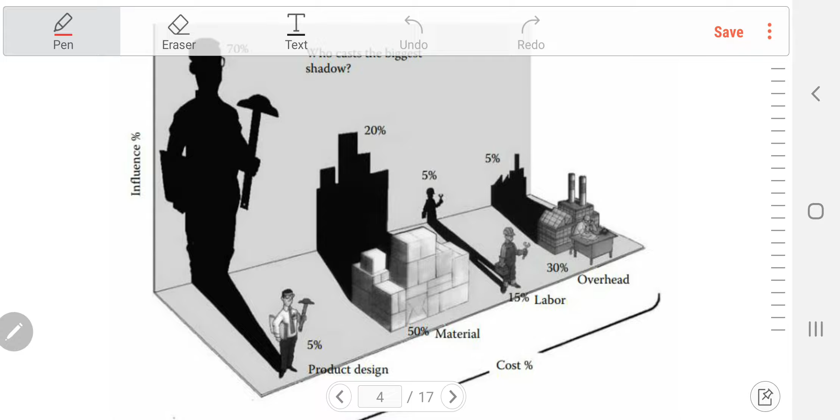But the thing is, when we look at the process of product manufacturing, we can see that product design, although the actual work is only about 5% of the production works, the influence is really huge, 70%.

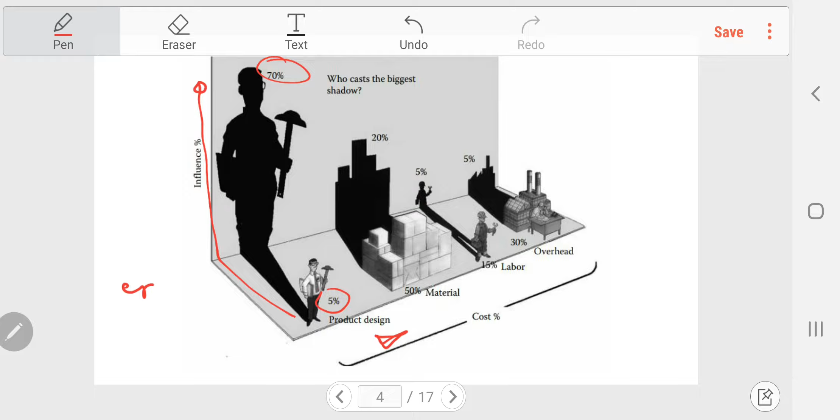And any error or correction, maybe rework, at this stage will cost you a very high amount of money when it already comes to this stage.

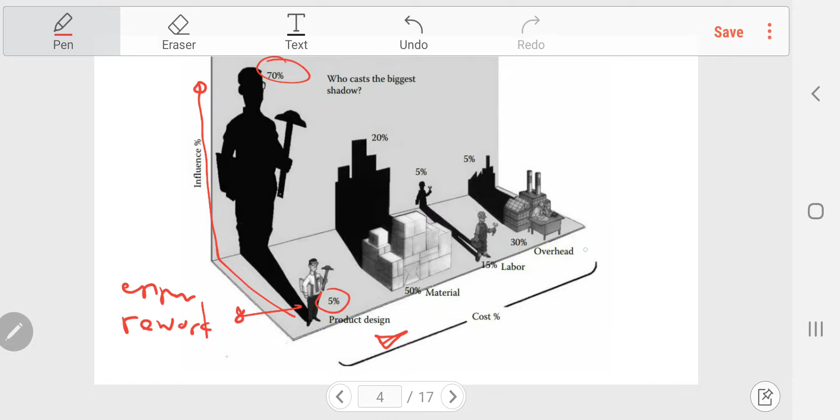So we need to keep in mind that it is good to do design in the best way that we can, or maybe try to do the first time right. Meaning before we go to the next process, we have to make sure that this design is at its best.

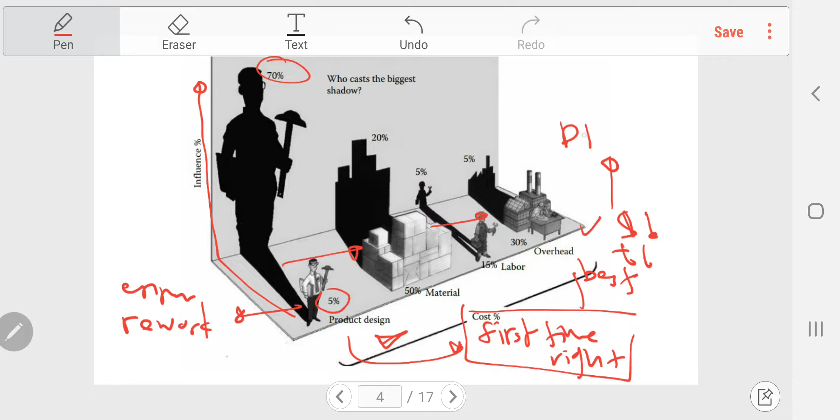And here, to get the best version, meaning using less money and maybe saving time, DFMA is one of the ways to do it. So the management needs to persuade the designer to implement DFMA because it will save them a lot of money and time.

It's gonna be hard at first, but I think it will be fruitful in the end of the process. So it is a cooperation, people need to work together.

And then number two, DFMA is not invented in their company. This is the second reason why companies do not want to do DFMA. So yeah, we resist, because resistance is normal, like I said. People don't like to change, people don't like to do new things.

And to reduce the effect of these new things, the designer should be involved in the decision to use DFMA. Meaning that when the first meeting for the product launch, product design, everyone important should be there, including the designer. The company needs to involve them as early as possible.

So that they will have the knowledge and a lot of info about DFMA and how they can do it in the process, because doing it early in the process will not make it quite hard.

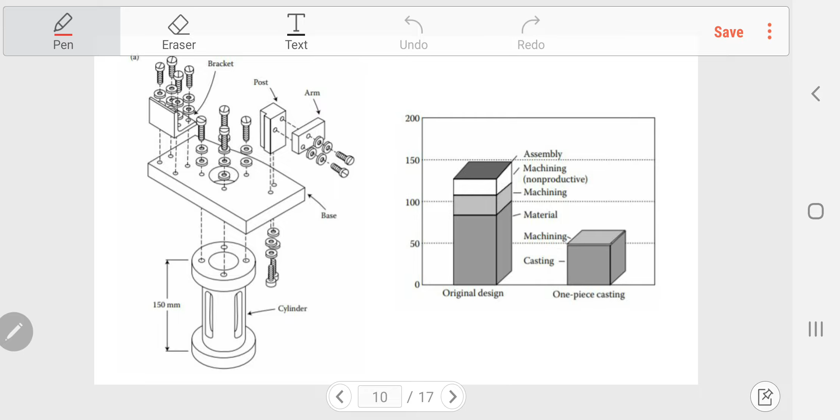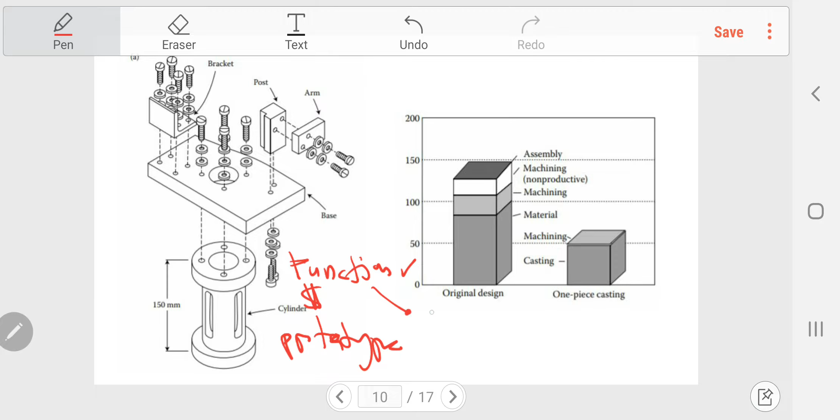For example, this is something like a part, and this is the design or the prototype. Usually, when doing very low volume products at the prototype level, people just focus on the function, not really the manufacturability or the cost. They just want the thing to work.

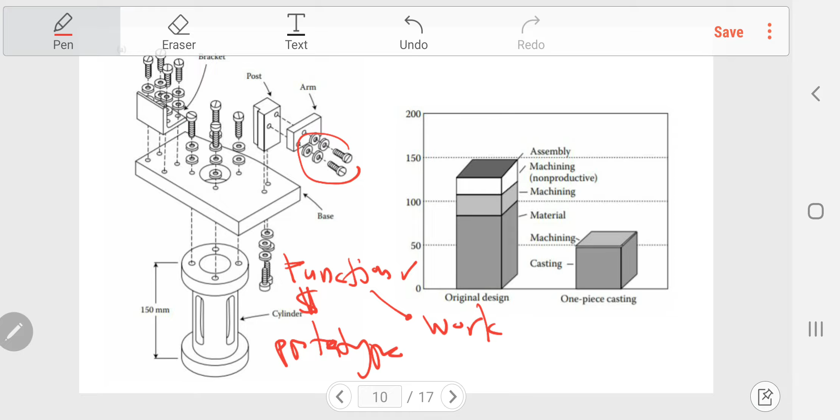When you take a look at the design, you can see there are a lot of screws and fasteners here. This is only a simple bracket, but it uses four screws for a simple bracket, so that is not cost efficient.

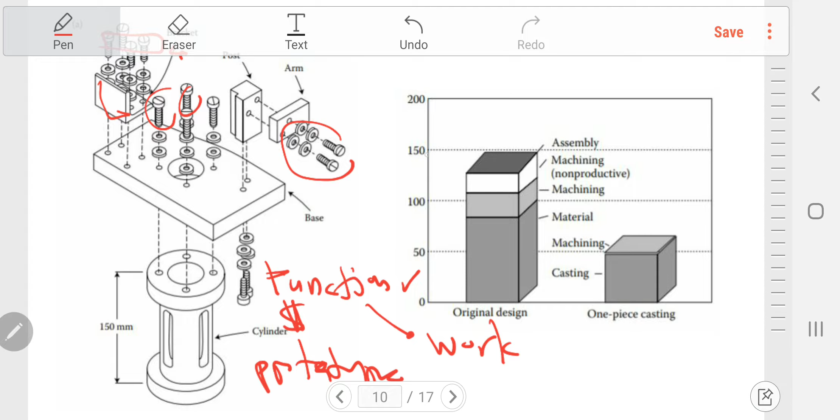When we take a look here, this is already the design, and this is the cost: the material for this part, then you need to do the machining, then maybe a finishing process like deburring, and then assembly. So it takes time and it takes money.

But if you implement DFMA, things become really simple, meaning you just use metal casting, like sand casting, without it being expensive. Then you just go to machining, and you get the same thing. So you can see the cost is less, about two times less.

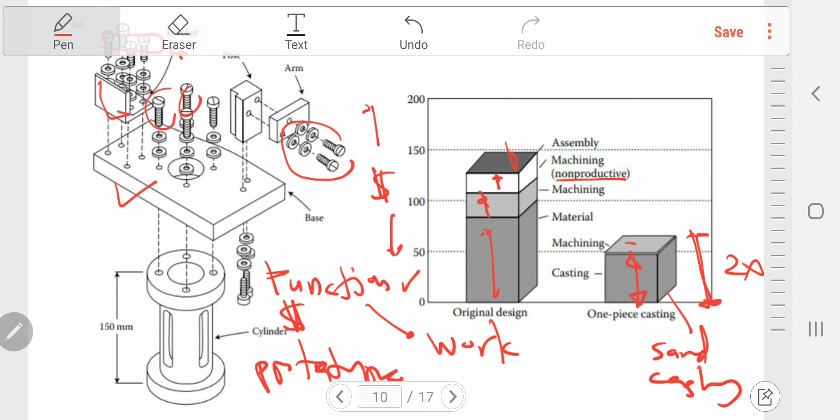This is proof that DFMA will save you money whenever your product is low in volume, so no need to worry about that.

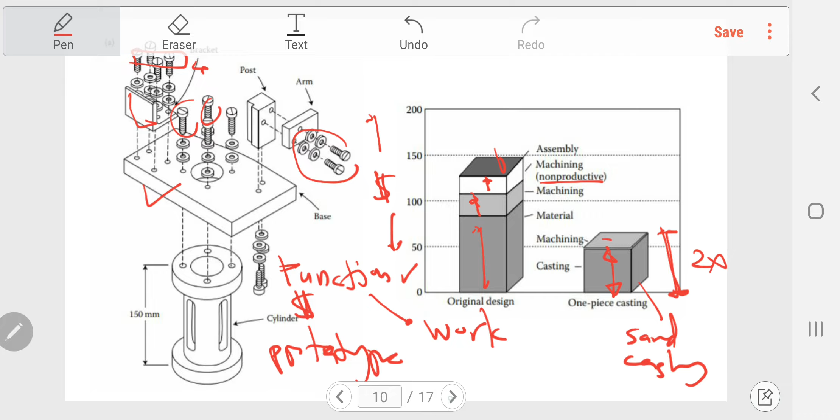The fourth reason is the ugly baby syndrome. It's quite interesting because a designer is a person of art and knowledge, a different kind of person, and to criticize a designer is not an easy task. It's just like telling a chef that their food is not really good. This is a big disaster.

Or maybe you see a mother with her baby, and you say that the baby is not cute. This is a big no.

So it's not easy to criticize a designer or their work. We assume that the design is their baby, and you want to say that their baby or design is ugly. It's like telling a mother that her baby is ugly. This will make people very unhappy, they're going to be really mad.

So it's not easy to do the revision of the design. But if you involve DFMA, you can really involve the designer in the analysis, and detect as early as possible if there are any problems with manufacturability, packaging, or machining. And if they are willing to work with the system, the company needs to provide incentive.

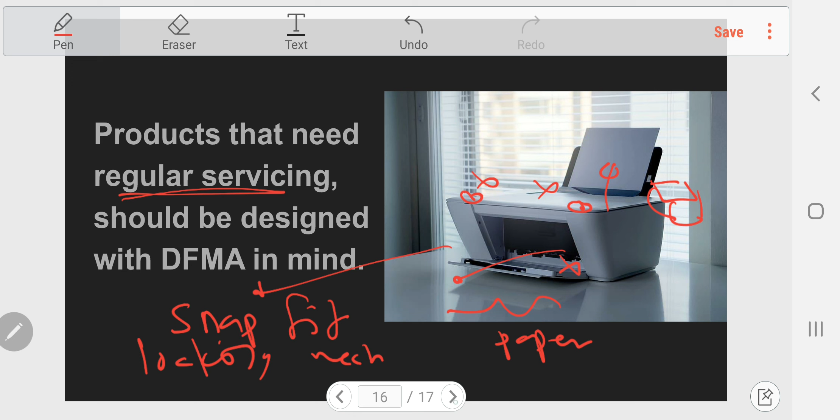So yeah, these are the reasons why companies don't implement DFMA. I hope you can keep this in mind, because when you are working in your company and you have an idea to improve a design, if people neglect your idea, you have some points to tell them.